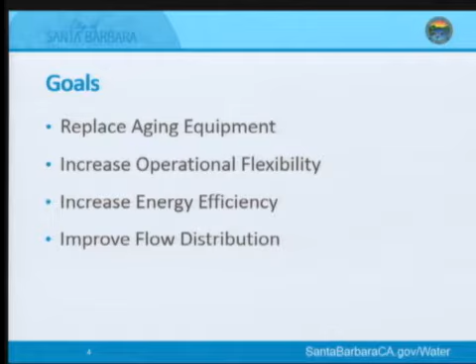Before I continue, I do want to make this one point: we currently treat to standards. We're not having any problems with violating our permits. We do make our permit, and that's not what this project is about. It's about improving our water quality, replacing our aging equipment, and making our whole process much better.

Before we go into the nuts and bolts of the project, I want to take a moment and bring you into the treatment plant for a little bit of treatment and process overview. I think it will help as we go through to bring an understanding as to what we're doing.

This is a snapshot of basically our treatment process. Up here on the upper left hand of your screen is where we've got the water coming in from the collection system. If we zoom in, we've got our headworks station right here. That's going to screen out all of our larger objects that we don't want going downstream to damage equipment. It screens out things like paper towels, twigs, diapers, all that sort of thing that can really get clogged up in our pumps. The next thing that happens with the water is it goes into our influent pump station.

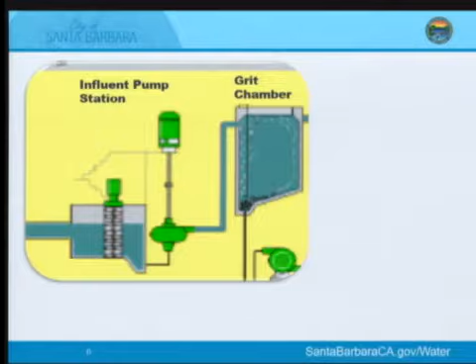Where it gets pumped up to the aerated grit chamber. Once we get inside of the grit chamber, we're going to be slowing that wastewater down. We're going to be letting our inorganics settle down to the bottom, as you see from the picture right here, and our water's going to continue on.

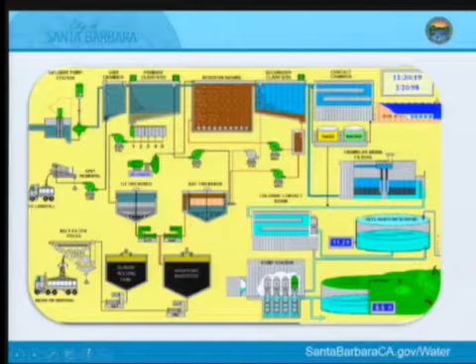We're then going to move over towards more of the top center of this picture. This is really where the nuts and bolts of the project are going to happen. We're going to go into our primary clarifiers next. In our primary clarifiers, we're going to continue to slow that water down. We're going to have those settleable solids start to settle out, and our water is going to continue down to our aeration basins. The aeration basins is where the biological process takes place.

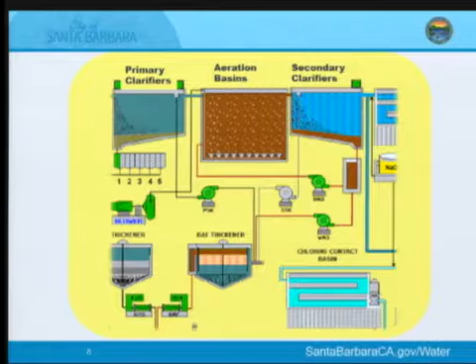It's where the treatment takes place with the bacteria that Joshua was talking about. This is a critical aspect of our project. We've got our bacteria in here. We aerate it because they need air, and then they break down the organics in our wastewater and help treat it biologically. Once it leaves the aeration basin, it goes into the secondary clarifiers.

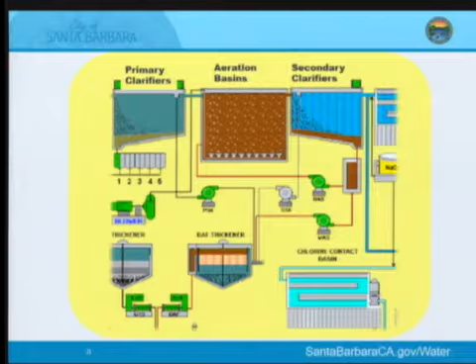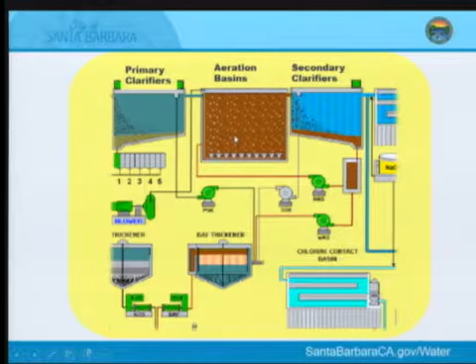Your bacteria, or your sludge, is going to kind of compact and settle down to the bottom, as you see with this brown stripe right here. Your clear water is going to be decanted off the top, and it's going to go down and be disinfected. What's going to happen with your bacteria, here's your sludge, is going to end up going into a wet well, and then it's going to recirculate and go through that whole loop again, although a portion of it will be wasted because we need to control our population.

So the aeration system improvements, most of the project is really centered around these. As I stated before, it's the biological process. We're looking for that greater diversity of the bacteria and that higher quality effluent when we're done.

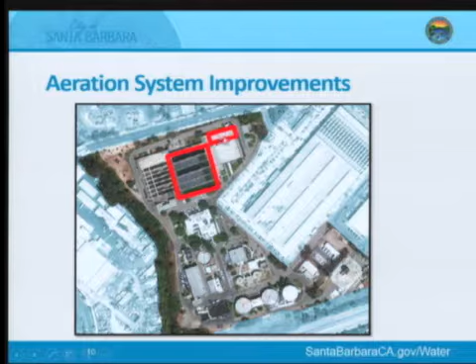Your aeration basins are this big red square right here. We have 6 of them. Underneath this big white area are your primary clarifiers - those are the covers on them. Underneath, we've got a whole gallery, and that's where your blowers are. Your blowers, they're really that critical component of the aeration basins. They supply the air that's needed when your bacteria is breaking down those organics.

In the absence of air, if our blowers were all to completely go down, within about 15 minutes we're going to start to see that the bacteria start to degrade. And within a very short period of time, they will start to die off. So it's really important that we replace our blowers.

In replacing these, not only is it going to be replacing our aging infrastructure, which is so important - we're actually having problems maintaining these at this point because parts are becoming obsolete - we're going to be giving the operators greater operational flexibility. They're going to be state-of-the-art blowers with controls where the operators are really going to be able to dial in that air supply to meet the demands of the aeration basins.

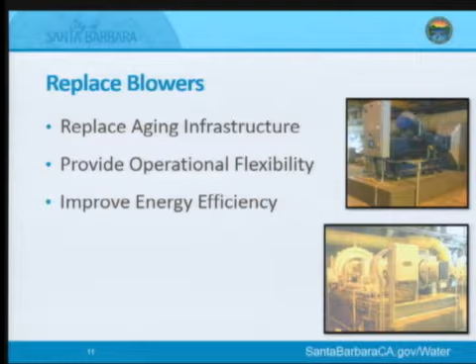We're also going to be improving energy efficiency. New blowers means better efficiency, and it's going to decrease costs for us on electrical costs.

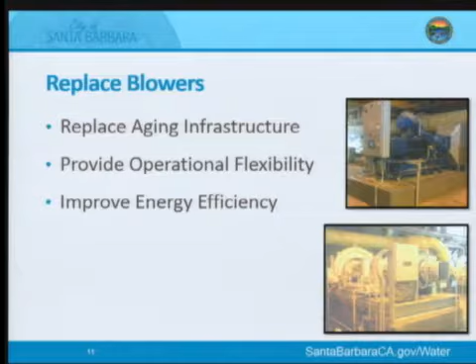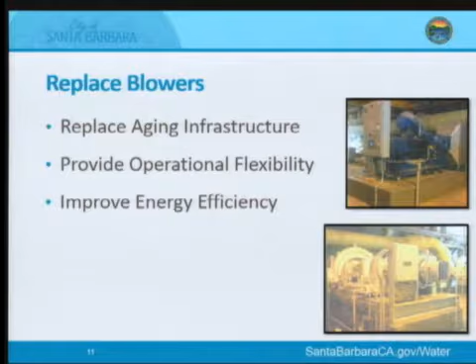I want to take a moment as we're talking about blowers to talk a little bit about construction. When we get into the construction, sequencing is going to be very critical. We start seeing the biomass degrade after 15 minutes, and we've got some issues with how our blowers are actually connected electrically. So it's going to be one of the many hurdles we'll face during construction, keeping the air going while untangling electrical connections that aren't quite desirable for a project of this magnitude.

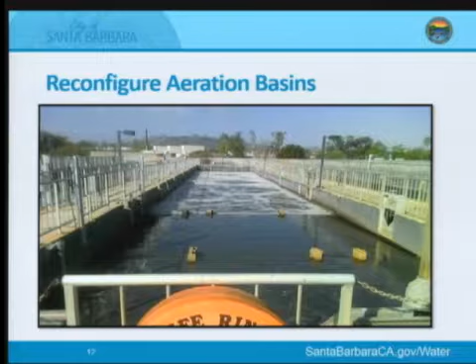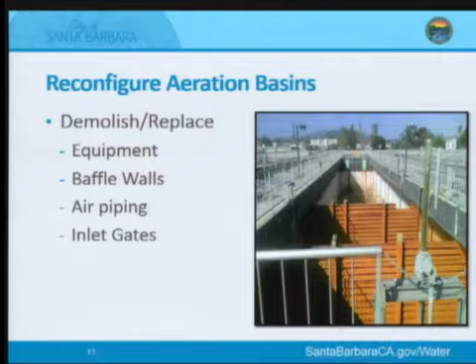One of the things we'll do when we reconfigure the aeration basins is change how we treat this water. We're going to break it into various zones with different bacteria doing different things with our wastewater, breaking down organic matter. You may see in the council agenda report that we're going to a nitrifying system, converting the ammonia and nitrate to nitrogen gas, so we'll have far less ammonia in our effluent when done. It's going to be the stepping stone for reuse if we ever choose to go there.

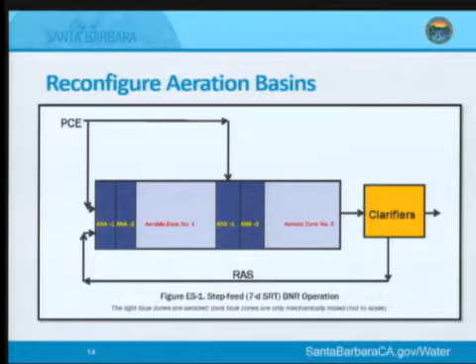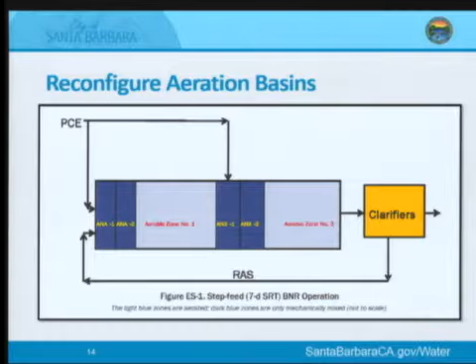When we go through construction on the aeration basins, we're going to start with just one or two at a time and upgrade them as we go along. The sequencing for that portion shouldn't be as challenging as some other portions, but it's still going to be very challenging to construct while this facility runs and treats wastewater 24/7.

In addition, in the clarifiers, we're going to be replacing some of our aging equipment, our drives, and things like that.

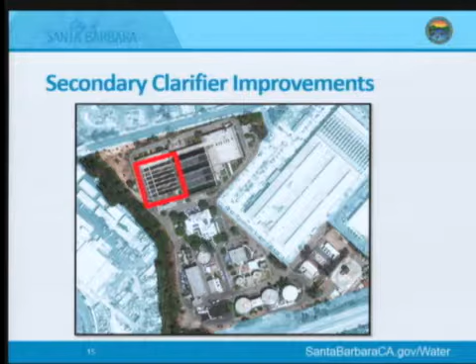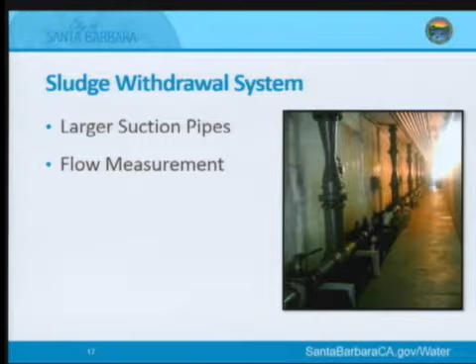We'll also be upgrading our sludge withdrawal system. Most of it is seen in the red boxed areas, all underneath the secondary clarifiers and down in the gallery. Here's a shot of the gallery showing some of the sludge withdrawal pipes. What's interesting is the sludge comes out and gets pushed hydrostatically back up to the aeration basins, then goes by gravity to the wet well - kind of a cool phenomenon. We'll be increasing the size of those suction pipes and putting meters on them for better flow measurement.

Here are some of the pumps we'll be replacing. These 3 pumps off to the right recycle our bacteria back to the front - you might hear the term return activated sludge, or RAS. Those are those pumps, and we're going to upgrade to 4 of them. During construction, because we have to upgrade both our pipe sizes and our pumps, the contractor will need to come in and put in a temporary pumping system while all these improvements are made.

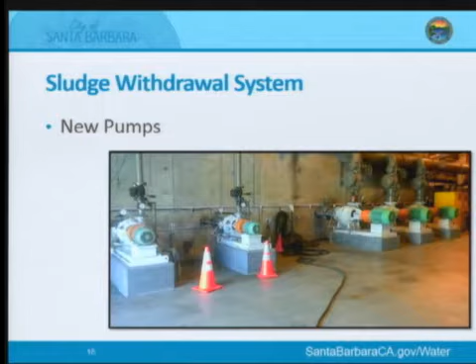In addition, we'll be putting a new line to waste our bacteria, or our sludge. This line is going to go down through the plant, as you see with that red line. Construction of it is going to be challenging because we have a number of underground utilities that cross our plant, and it's just very challenging to do.

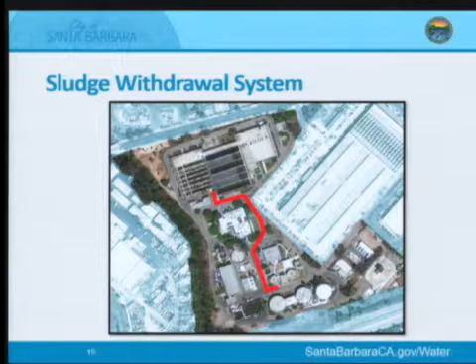I'm sure you've heard a little bit about some of the contaminated soils issues we've had with the desalination plant. We've planned for that accordingly in our bid by putting a contingency in, although we're very hopeful that since we're only going down 3 to 4 feet, we're not going to hit contaminated soils. But that's something we've actually taken into consideration in our bids.

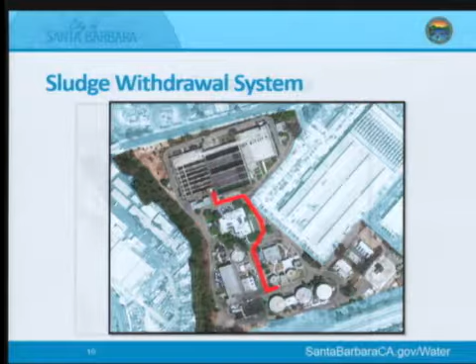We'll be having a new chemical storage area. One of the things we're moving to, and I spoke to the commission maybe a year and a half ago about, is chemically enhanced primary treatment. We'll be putting new chemicals into our primary treatment that will help us reduce the overall loading to the secondaries, which means you'll be able to increase or decrease some of your air demand. We'll be using a couple different chemicals.

Here's the site. We'll have ferric, which is, we already use ferrous at the beginning of our plant for odor control. It's required for part of our APCD permit. We're just going to be putting it at a different spot now, at the front of our primaries. It's going to serve as a coagulant, so it's going to help those organics start to clump together.

Then we'll be putting a polymer in there. That polymer is going to act as a flocculant, so it's going to help those clumps start to settle down. In addition, we'll be putting ammonium sulfate in, and that's going to help us with our disinfection process.

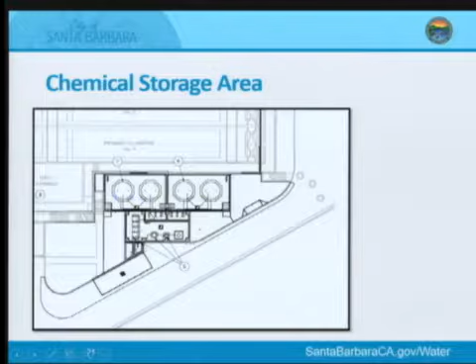I put the plan view up here so you can see this is going to be a bulk storage area. So the drivers, they'll be able to come up through this driveway, park their trucks right here, and pump their chemical into these bulk tanks. And this is a 3D model of what that site will look like.

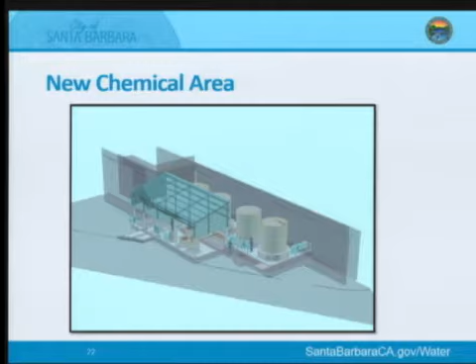Probably one of the most critical things is the startup, as we start moving to this new process of diversifying our bacteria, moving towards a nitrification process, is that actual startup of it. We anticipate that we'll be putting in all of the improvements first, and then we'll be looking at starting up and changing this process.

It's basically recirculating those bacteria through. It's not introducing new wastewater to it. That's happening in the other remaining 3 and 4 basins. This is really just going to be growing that bacteria. Once we get to that desired concentration, we're going to add one more basin online, one more basin online, and then we'll flip the switch, so to speak, and we'll be in our new mode of operation.

We expect that it'll take somewhere between 14 to 21 days before the process is stabilized. This is a very critical point in the treatment process and in this construction process. We've asked Brown and Caldwell, our designers, to have their process people down when we're starting up this new process. And it is going to be critical.

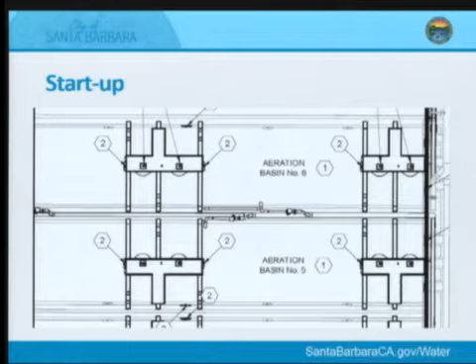However, construction management isn't just construction management on this project. It is operational support as well. We have Brown and Caldwell coming down to help us start it up. We have them helping us with updating our operation and maintenance manuals, upgrading our CMMS, our computerized maintenance management system, with all of the new equipment. We've got some design going on.

One of the things we found out during final design, very, very late, was the water from the desal project has a very low alkalinity compared to what we're seeing. We're going to need to design an alkalinity facility while this project's in construction, and we're going to have them constructed as well. So there's also some design in that nearly $5 million number.

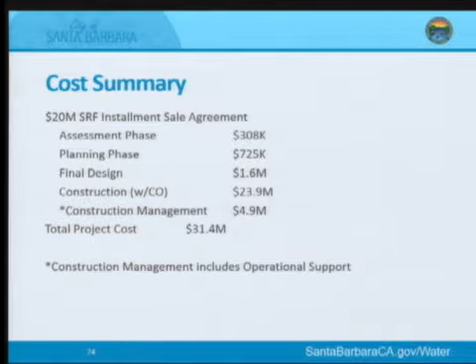So one of the things you may be wondering is how we got from $20 million to $31 million as a total project cost. Between the preliminary design, when we were at about $16 million construction cost, we have added the chemical storage area, which wasn't considered initially. That's a couple million dollars. We've had some additional equipment, electrical work that we've had to do and put into the project.

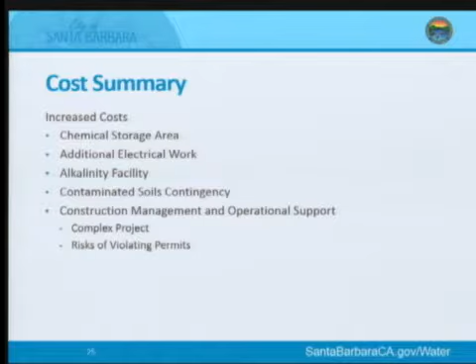The alkalinity facility, we've put about $500,000 as a placeholder in the bids for that facility. We've added about $500,000 of contaminated soils contingency that we really hope we don't have to use, but it's there if we need it. And then obviously the construction management and operational support is higher than the original 10% that we normally would see on those contracts. So that's how we got from 20 to 31.

If we take a look at the project timeline, we're hoping to go to council in February for award of a construction contract. Some of the process to get there is challenging because of the SRF loan. We have to do an amendment to our loan from the $20 million to the 31, which is in process. Once we get that amendment, we can go to city council and award the construction contract. It could be we'll have to do an ordinance to allow the Public Works Director to enter into the amendment.

So there's a little bit of a timing issue. We may be March, and then we're hopeful we can start construction as soon as April. It may be more like May. And it's about a 2-year project, so you'll look to see a completion in summer of 2018.

And that concludes my presentation, and I'd be happy to answer some questions.

Thank you. Very nice presentation. Do we have any questions from the commissioners?

Thank you, Mr. Chair. Just a couple. So, Josh, you may be more appropriate. So, as these loans stack up, the $31 million here, the $50 million there, is there just a general amount for a single-family residence that you could say for a $31 million loan or a $50 million desal loan that it's adding to a monthly service? Amortized, it's a 20-year amortization?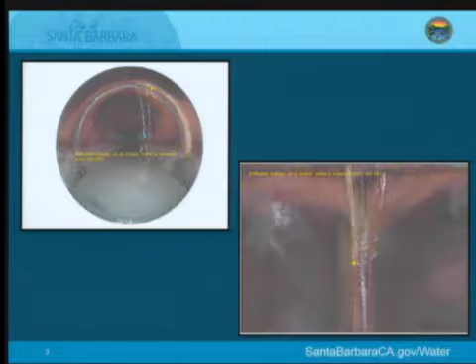It should be complete. So taking you through the purpose of this project: back in about 2012 we did a condition assessment of all our large diameter sewer mains, one of which is the 33-inch clay main out on Cabrillo that runs in the beach—I'll show you a picture of exactly where it is on the next slide. We found a number of infiltration spots. You can actually see the infiltration coming in—that's seawater coming into our pipes. While the pipes are structurally sound, we didn't find any real big deficiencies in them, but we have a lot of active infiltration coming in on those pipes.

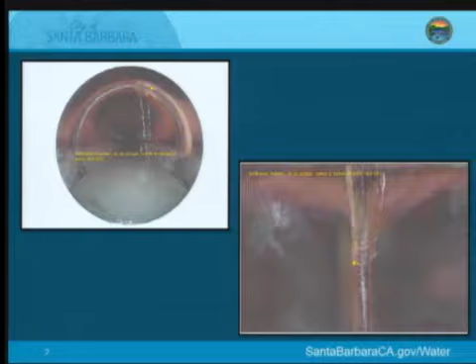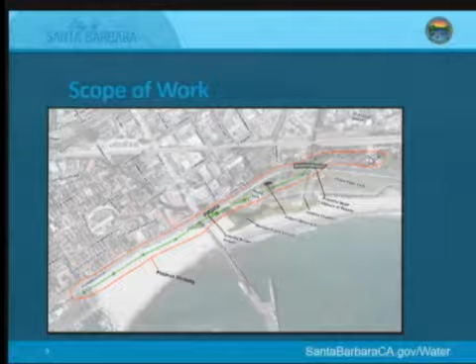Part of the challenges with this project were permitting. That pipe lies partially in the local jurisdiction and partially within the California Coastal Commission jurisdiction. Initially we had some challenges as to how to move forward permitting wise, so we went to Planning Commission and got their approval to defer to the California Coastal Commission to get a waiver. That seemed to streamline the process, only having to work with one jurisdiction rather than two as we go in and out of the jurisdictions.

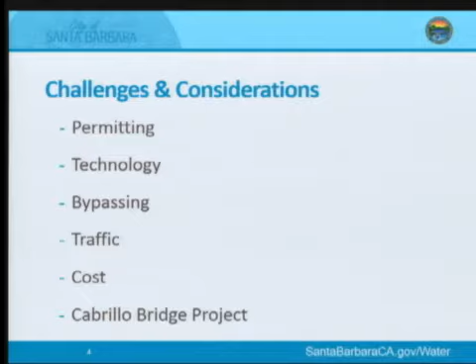Technology, what's the best way to accomplish this? We looked at all sorts of different technologies. Do we just chemically grout those joints? We felt like if we did something like that, we would have infiltration pop up somewhere else down the road and we wouldn't really be solving the problem. We looked at the different types of rehabilitation, and we finally landed on the cured in place liner, which is similar to what we do on our 6 and 8 inch lines all throughout the city.

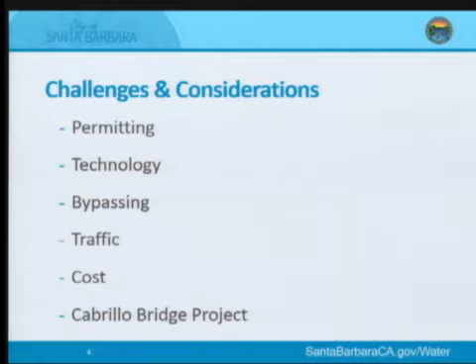Bypassing and traffic control were very challenging for this project. Cabrillo Boulevard is not somewhere that I really like to have bypass lines running down, pumps, traffic control. Cost was definitely a concern, as well as we've got that ongoing Cabrillo Bridge project. It's causing a lot of problems with sequencing.

So I talked a little bit about how we're going to do the cured in place lining. We left it open. When you do the cured in place lining, you can do one of a couple different ways of curing the liner. Traditionally, as you see in our 6 and 8 inch lines, we do thermal cure, so they'll use water or steam to put the liner in, cure the resin, and it becomes a very hard, structurally sound pipe within the pipe, so to speak.

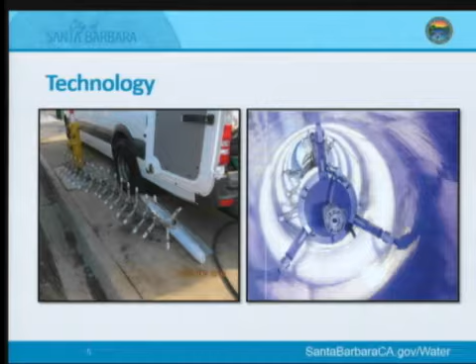One of the benefits to having UV cured is that it came out to be half the price, and the reason it came out to be half the price is because their curing time is much faster. They're going to be curing the pipe at about 8 feet per minute, knocking down that overall construction of the segments to about an 8 to 10-hour day by the time they set up their bypass, clean the pipe, TV the pipe, put the liner in, cure it, and take it off bypass. We were looking at considerably more time if we were to use the traditional steam or water cured.

Another benefit is that styrene smell, that stinkiness that you might have smelt if you went by any of the rehabs. We tend to get some complaints on that. UV cured doesn't release that styrene because it's got a different curing process. We're also directly upstream of the plant, rehabbing very large mains, and styrene can really ruin your day on a secondary treatment if you get a good slug of it coming in.

So they were able to come in at a lower bid because they don't have to deal with the styrene, whereas the other companies bidding on it, the traditional water cured, had to put in a non-styrene resin, and at a premium cost.

We also were looking at localized chemical grouting on some of the pipes because we've got that infiltration coming in. When you're doing the thermal cure, that causes a heat sink, so we had to put that into our bid items. With UV cured, we are not going to have to utilize those bid items because all you have to do is inflate your liner to a pressure that's greater than your water pressure coming in, and then you can go through and cure it. So we're going to be looking at about $100,000 savings by not having to chemically grout the actual pipe segments themselves.

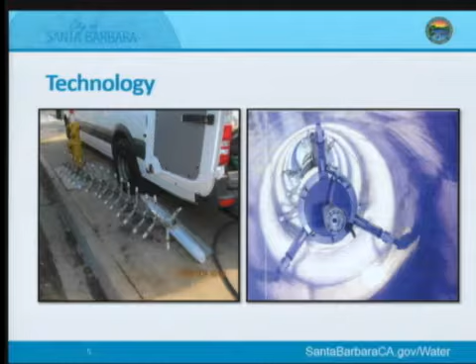They're on the northern side right now constructing. They're going to move to the southerly side. We lose our ability to bypass basically April 1st when they move over to the southerly side. So we're going to be in construction next month, March, and then hopefully we will be completely done.

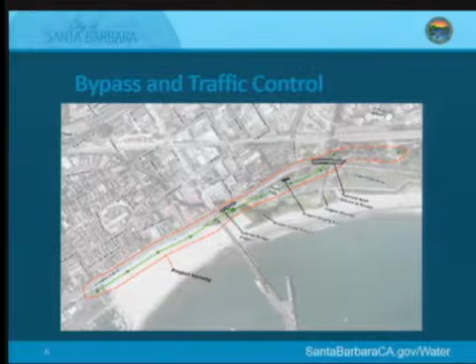We have put a lot of conditions regarding weather into the contract so that if the contractor has rain in the forecast, they're not allowed to construct because we don't want them constructing when we have inflated flows. If we didn't do this project now, we'd be waiting until Cabrillo Bridge is completed before we'd be able to get into our next window and do the construction.

Our construction costs and timeline: we're looking at about an $860,000 construction cost. That's where the low bid came in. We'll be giving them their notice to proceed in February, right around the 1st. You'll see them mobilizing down on the beach, and they should be substantially complete in April. They may be doing a little of the manhole lining work, but that won't be as difficult as the actual sewer main lining work.

I'm not sure I mentioned this at the beginning, but the whole purpose for this project is to reduce the total dissolved solids coming into the plant. When we're getting seawater infiltration coming in, it's raising our TDS, or total dissolved solids. So this is going to help bring that number down, which is very important for recycled water.

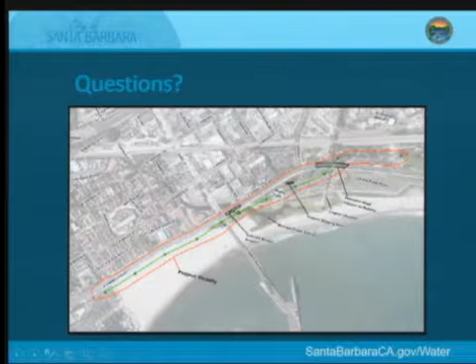I'd be happy to answer any questions. Thank you, Ms. Arroyo. Any questions? Commissioner Jordan, thank you, Mr. Chair.

So if you're having infiltration, aren't you having exfiltration too? Our pipes are down there surrounded by seawater, and we've got that hydrostatic pressure pushing water in. I suppose under certain conditions it may be possible that your internal pipe pressure would have to overcome that hydrostatic pressure for that to happen. So we're thinking it's highly unlikely, or doesn't really happen a whole lot if it does.

And on that line on the left part where it says project vicinity, that's all in the sand actually where the piping is? Correct, it is in the sand. We come out of the sand a little bit here, we cross Mission Creek right in here, and then there's Skaters Point right there. Then it continues on up across Cabrillo Boulevard and into the plant.

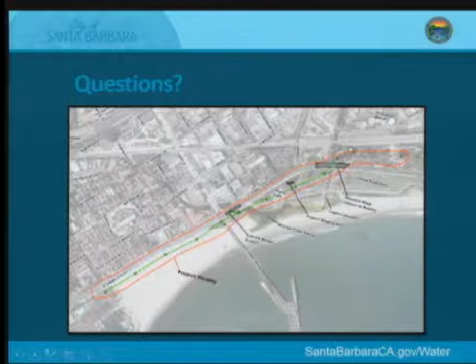And you said how many feet a day? They're going to do about one segment a day. The segments range from about 300 to 500 feet. It's going to be 2,400 lineal feet total.

Other questions or comments? I had a question regarding the CIPP, using steam cured versus UV light. How do they make sure they maintain adhesion to the wall of the pipe when running the UV train through? Because when you inject steam, you pressurize the pipe and it sticks to the wall. How do they maintain that using UV? They use air instead of steam, air that pushes it out. So it'll actually be pressurized as the UV light goes through? That's my understanding, yes. And I can confirm that for you.

I have just a comment that I'm very glad to see this being done. It's been a matter of frustration for a while that we're getting the seawater infiltration there. Ironically, one of the things considered in our study of desal intakes is an infiltration gallery in the beach, and in fact we have one, albeit rather inefficient. So I'm glad to see we're getting rid of that. Thank you for the presentation.

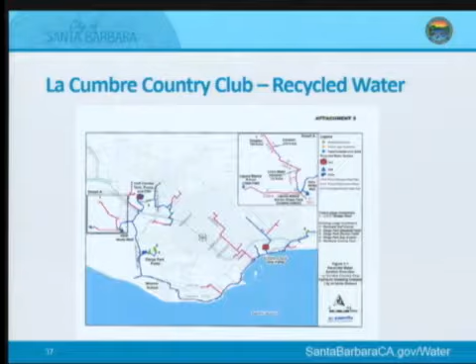At this point, we feel it's something worth exploring. La Cumbre Country Club is very concerned that if the drought continues, there could be a lawn watering moratorium, and being one of the only golf courses that doesn't have access to recycled water, they would be unfairly punished in the sense that they'd have to let all their lawns go.

So we are looking for input and comments from the Water Commission on this item. Have any comments? I'll go, Ms. Burney. Thank you very much.

I guess my concern goes back to what we've talked about for the last couple years, which is the cost to water turf. While I know a lot of community members use the golf course, my main concern would be providing recycled water at our existing recycled water rates and not the actual cost. That would mean our residents are bearing the brunt of people being able to golf. So if we proceed with this negotiation, which I have full confidence in staff to handle, I would just want to ensure they were actually paying the true cost of that water.

Mr. Chair, I see in the staff report, and I just wanted to clarify the same thing. It says that you're going to negotiate on the basis of full cost recovery. And I'm assuming that's exactly what Ms. Burney is talking about also.

That's correct. We've had some initial discussions with them, and I've been very clear that there's no way we're subsidizing this water to them. I think there's a general understanding that they'd be paying the full cost of the recycled water, and at times it's going to be more expensive than their potable water. But I think they're seeing the need to diversify their supplies, as this would be their next cheapest option to explore.

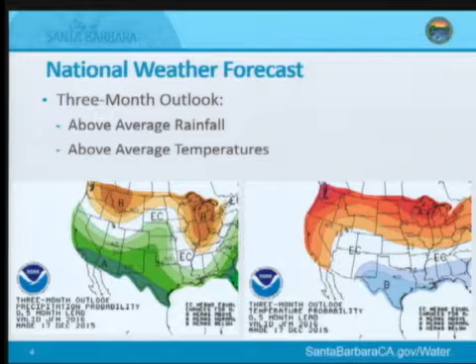Weather forecast continues to be optimistic going into the future. Unfortunately, NOAA didn't have their updated forecasts when we checked today, but despite January being somewhat dismal, they still believe the rains are coming in February and March.

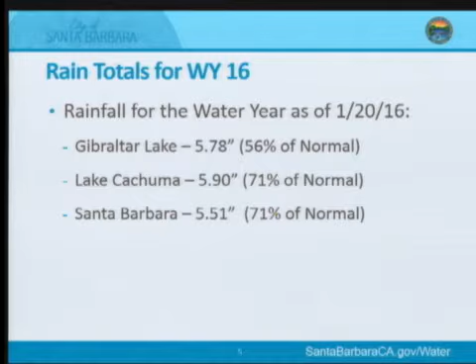Gibraltar, sadly enough, sits at 56% of normal rainfall. The big two-day storm event in early January unfortunately did not pay off in the backcountry as much as it did on the coast. Kind of unusual - usually we get twice the rainfall back there or more, and it just didn't bear fruit this time around.

We have some information on how the rest of the state is doing, and this plays into our strategy for getting water for next year. As we've talked about before, we do have sufficient supplies to get us through 2016. We're already planning ahead for 2017. As it stands now, Northern California is tracking on average, which is hopeful.

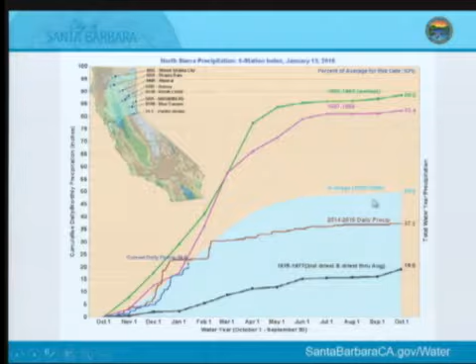Absolutely, thank you. So what we have on this graphic here - and I apologize for the size - this right here, the blue shaded area, this defines what an average rainfall looks like. This is a compilation of, I believe, 8 weather stations up in Northern California that they use to make this graphic, showing where we were last year with that dismal rainfall, but also showing some of the peak rainfall we've had, 82-83 and 97-98.

Right now, we are tracking nicely with an average year in Northern California. Despite all the media coverage of the rainfall, really it's average, which after so many years of drought is just a vast improvement, right? So we continue to watch this, but what's hopeful is our ability to purchase water should we need to do that to make ends meet for next year, which we're going to need to start discussing shortly. Hopefully the spigot doesn't turn off for Northern California and end the year short - but that's where Northern California is.

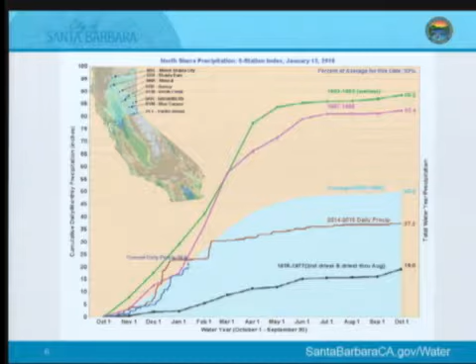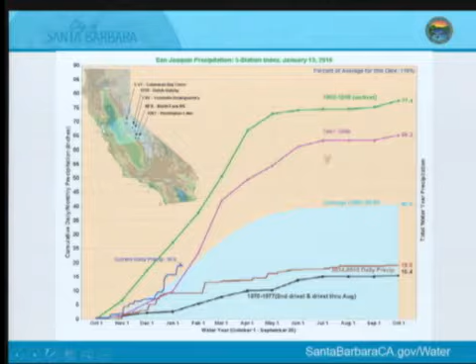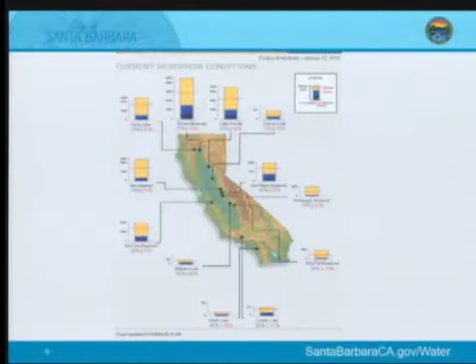General reservoir status, we're still way below average. The red lines on all these depict what we might expect that reservoir to be this time of year on average - still significantly below. And then this last graphic here - oh, thought there was a snowfall. There you go - this is snow accumulation, northern, central, and southern, and right now it's tracking on average for snowfall. As we've talked about before, the state's largest reservoir is really snowfall, and this is what will ultimately feed those reservoirs come spring and summer.

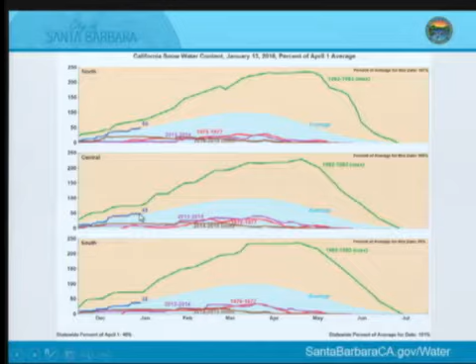Community conservation continues to exceed our target, which is fantastic. As we've talked about in the past, December, January, February, March are difficult times to hit the conservation target because there is less outdoor discretionary water usage. But the community was able to hit 28% for December. We're now at 34% cumulative conservation since declaring Stage 3.

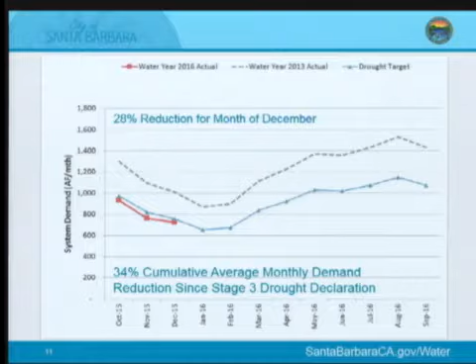Our water supply strategy - I continue to show this graphic here with our current supply strategy at 25% conservation. It shows about 2,000 acre feet of shortfall in 2017, and this assumes no reservoir inflows and no additional state water purchases. So we've been focused on how to address that. The next graphic shows what if we move to a 35% conservation target in May. If things stay dry, I believe this would be where we'd be recommending to the Water Commission and council that we go.

In that case, we're looking for about 300 acre feet of water to purchase roughly for next year to make ends meet. Is there any questions or comments on this before I move on?

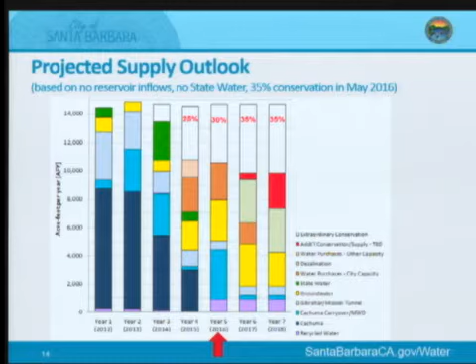Okay, we talk about it so often, I apologize if I skip over it and don't go into great detail. Water supply planning, tentative milestones—just want to keep putting this out there. This is what we're currently planning for.

On the demand management side, as I said, we're looking ahead. In March, we're going to kick up the discussion, depending on what rainfall looks like, whether we need to move to that 35% target and whether we need any additional regulations to get there.

On the supply management side, we'll be talking about water purchases here shortly. We actually will start looking for water in February. That's going to be an active discussion, and we'll start getting agreements lined up and wait as long as we can to execute, which is typically in the April timeframe.

We are moving forward with at least the general planning for a desal expansion. The current timing for the expansion right now is where it would actually play a role in our water supply should we decide to move forward—it would not really impact us until 2018. So expansion of this facility does not do anything for us in water year 2017.

Again, I don't think this is where the Water Commission is, nor where staff's at, but I think to be prudent, we're doing the planning necessary for this. The one thing that we've been developing is the cost for the transmission of this water. We have a pretty solid number from IDE for the treatment aspects of it. We are asking them right now to give us if there's any cost impacts from holding their bid until late July, because we feel like to get all the funding in place, it would probably be late July.

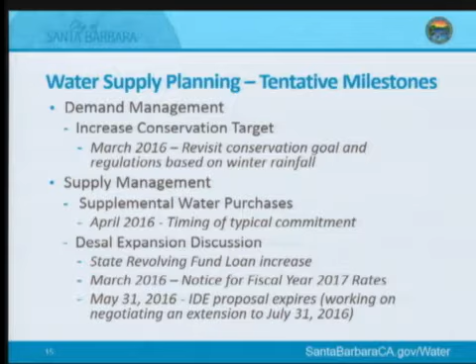I should back up really quickly and say this: we believe if things remain status quo for now, there will not be a need to consider expansion. We feel that based on rainfall in Northern California, we should be pretty successful in purchasing water, and believe going to 35% conservation kind of heads off the need. But in the meantime, we're still preparing this information for discussion.

Water rates updates—we are in development with those, going back and forth with Raftelis, trying to incorporate. There's just so many elements to a rate model. Trying to get all that information together and present something to Water Commission in February. We may have to have a special meeting with Water Commission in early March as well, just timing, trying to get all this together, because we do need to get notices out to the community in March of our proposed rates.

And so there's so many pieces in the air. Certainly having some confidence about what the rainfall is going to be and what kind of supplies we have locally will be really important to that discussion. What we're really focusing on for FY17, because we do have the costs in there for reactivating the desal plant and for operating it, is the status of our reserves.

Our reserves are in pretty dismal shape, and the reserves have been set aside for just such an emergency, so I think that's appropriate that they're so challenged. But it's trying to figure out what is going to be our recovery plan—how long are we going to take to recover those. That's going to be part of our rates discussion, and I think some of the policy input we're going to be looking for.

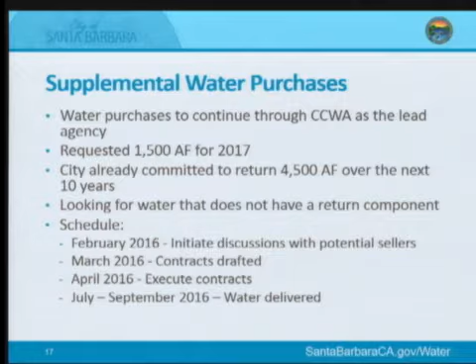So in February 2016, we want to initiate discussions with potential sellers. We've reached out to the water broker we've used in the past, and he's already got some potential sellers in Northern California. We'll probably be drafting contracts in March, holding off until late April before we have to execute them. That's basically the planting season up there, so they need to know whether to plant or fallow the land. That water then gets delivered July through September to the State Water Project.

So Gibraltar, as of yesterday, has 518 acre-feet in it, or 10% of capacity. We are currently not taking any water from Gibraltar due to the poor water quality.

Staff up there said they're prepared for El Nino should it show up. They've been up there making sure to keep the roads open—those routinely get closed anytime we get any rain, there's just rock falls. They've got food up there, so they can stay for several days if they get cut off. And they have all the log booms out for debris.

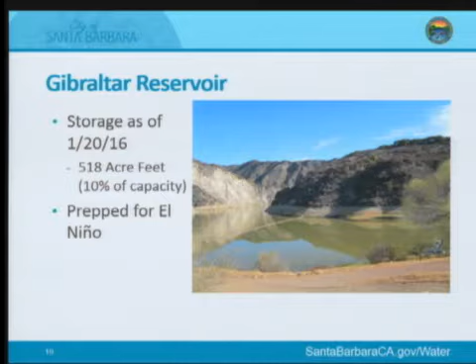Lake Cachuma sits with just over 28,000 acre-feet, or 14.8% capacity. Fish water releases continue at about 280 acre-feet a month. The latest discussion, which we talked briefly about last month, was the evaporation. The Bureau has made a decision on how the evaporation of the lake is going to be managed, but they did agree to revisit it in the spring.

The way the Bureau is going to be managing it punishes anybody who has water in the lake come this summer. We tried to point out that the way they've structured the evaporation—who takes this evaporation—really incentivizes anybody who has water to get it out of that lake before summer, because you're going to be taking the full burden of the lake's evaporation on whatever water you own. In particular, the challenge is that the downstream water held in the lake does not evaporate.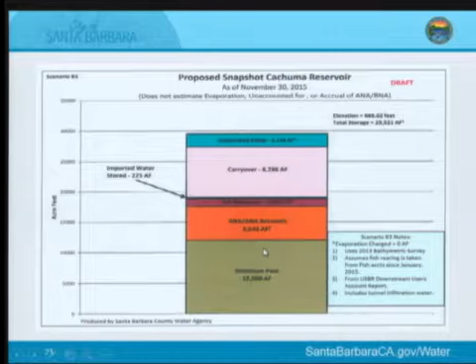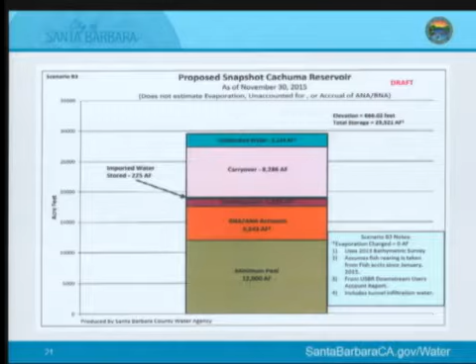We've been pushing the Bureau, saying this minimum pool should help make up the balance of this evaporation. For whatever reason, they've been holding that water as sacred and saying it shouldn't be used. We're hoping if things get bad, they'll reverse their decision. We'll be bringing the Water Commission along on this in case we need some muscle. This is one of those frustrating ones, and hopefully we can figure it out for the next drought, because this is...

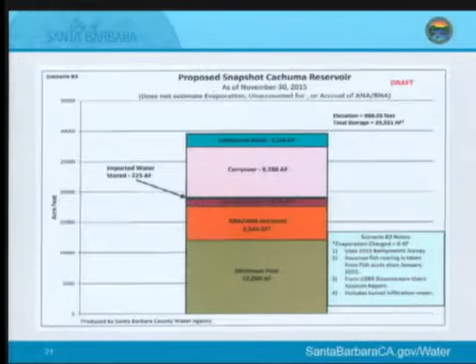Unfortunate. Do we know what the anticipated evaporation is going to be? We do—we've made some estimates. The county has put together some estimates.

I want to say it's somewhere in the 7,000 acre-feet of evaporation. Right now, under the equation that they have, our carryover water would take about 2,000 to 3,000 of that evaporation, and so they're looking and saying, okay, well, the other 4,000 will also come out of carryover. Well, there's only what's left in carryover. It basically erased everything in carryover.

And what proportion of that carryover is the city of Santa Barbara's? About 3,000 acre-feet. We actually have, that was the other challenge, some of the most carryover left, which on one hand is good, and on the other hand, you don't want to be left with the most carryover because you're going to take the most evaporative losses from it.

So this is something that has our full attention, and we continue to push back on it. Hopefully we'll see some inflow this year, then that evaporation will come out of any inflow that comes into the lake. Unfortunately, though, there hasn't been adequate inflow in there to make up for that evaporative losses.

And what's the unallocated water? That is actually inflows from the Tecolote Tunnel. And right now, we're planning to use that to help offset some of the evaporative losses. So that's how we've kind of structured it with the Bureau.

Well, okay, how about this water? Since there isn't sufficient water outside of carryover anymore, there's no new water. Usually that's where a lot of the evaporation comes from, is the water in the future. We at least agreed that water coming from the tunnel would go to help satisfy some of the evaporative losses. Unfortunately, it's not. What does it end up being? It's not sufficient to cover the full evaporative losses.

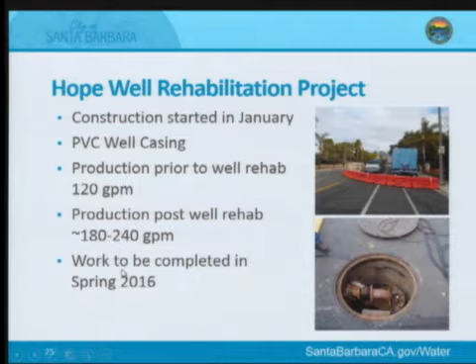Desal project update. We did go to council and get the $2.3 million that we needed to move forward with the cleanup under the proposed project. Again, it doesn't clean the whole site, it's just taking care of the area where we're going to be working. So far, we're able to accomplish this within the $55 million that's been allocated already, so this basically is just eating up a lot of contingency that we had built into the project. Should we come across anything unexpected, then we'll have to talk about increasing the loan amount.

Schedule impacts, we did lose about 30 days of work as a result, and Ms. Szymanski is working with the contractor to try and recapture that time. At this point, I haven't seen anything formal out of it, but I do know they're working on it. So I think worst case scenario, we'd be talking about a November completion versus an October completion. Don't think it'd have a huge impact on our water supply planning at that point.

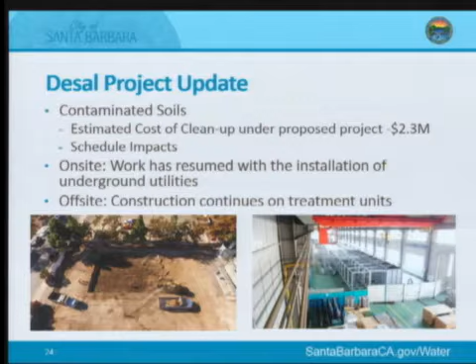Thank you. Last month, when Ms. Szymanski was here, she mentioned doubling up some of the construction forms to speed up that cycle. Obviously, there's additional costs there, but it sounds like from what you just said, we might not be doing that. Can you just give us an update?

Commissioner Burney, yes, that's still the plan, is to basically pay, and I don't remember the cost, but it was like $40,000 or $50,000. Instead of reusing forms, they're going to create new forms for everything so that they can do one big pour rather than a whole bunch to try and accelerate the schedule. I don't know what the schedule benefits to that were, but they are still working under that.

So, desal project update continued. You have the feasibility study. I think the most significant is the subsurface intake study. A draft report is out and available for public comment.

In summary, nothing survived that initial screening, and we are looking for any feedback on that. But based on the work plan and criteria we came up with, nothing survived that criteria.

Potable reuse study work is still in progress. We anticipate sometime in early June having a draft report for public comment, and ultimately at the end of June having a public meeting and finalizing that work. Should there be a viable option, we'd roll into a study phase of that. And then desal grant funding.

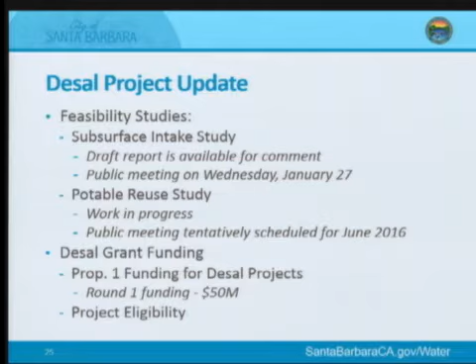And so obviously we take a particular challenge to that, and I have already gotten a proposal from BBK to help us make the legal case for why these Prop 1 funds, which were set up and sold to voters in response to this drought, and this desal project we've reactivated in response to this drought, it seems ridiculous that these monies shouldn't at least partially go to help offset those costs.

And so we have seen other Prop 1 money tied to the governor's declaration or the actual approval of Prop 1 by the voters as the start of the eligibility date. So we're hopeful we can make a legal argument for why they should consider a different eligibility window.

One thing that particularly piqued my interest: when we asked why it's taken so long — the voters approved this in 2014, and you're not going to let the money go until 2017? We've seen other Prop 1 money released a lot quicker. What's going on? Oh, well, we just don't have the staff, we're short on staff. And I'm like, so you're telling me because you don't have staff, my project's not going to be eligible for any grant money? That was kind of a frustration.

At that point I said, well, I'm more than happy to pay to have staff here to help you. And it was a very cordial and nice conversation. They seemed supportive, they really liked our project. That was one of the things I wanted, to introduce our project, and they were certainly very intrigued. They appreciated how much we have done for conservation before just moving forward with desal. They thought we were a good example of how they wish any community considering desal would approach it, exhausting a lot of their conservation efforts first.

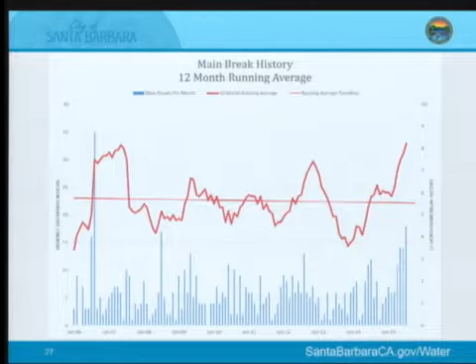As I think I mentioned last month, we are working on something to bring back to the Water Commission for a bigger discussion on possible approaches. The challenge right now is in the midst of an emergency trying to figure out financially how to go about doing this, but nonetheless I think we need to keep this discussion alive. We just had a main break this morning on Castillo on a 12-inch main, which is fairly significant. Unfortunately it was near a parked car, and the car fell into the sinkhole. Very unfortunate, but we'll hopefully work with that car owner and make him whole. Needless to say, our staff have been putting in tireless overtime hours trying to respond to all these, along with their ongoing regular duties.

So, anyway. Is there a seasonal signal in there?

Chair Keller, there is a seasonality to this. We certainly see fall and winter with a much more significant increase in main breaks. As we go down through it, that'll be part of our presentation - we can break out the seasonality aspects, break out what pipes are causing the majority of these problems - mostly from cast iron pipes - and from what age. There's a lot to this, and I think we could be very surgical about what work we plan and move forward with.

But certainly we can expect that during cooler times, especially as the temperature changes - and I think I might have mentioned this before - you've got a system that's frail, on the end of its useful life, and it doesn't take much. When you get that temperature change of 15, 20 degrees, that water's sitting in a reservoir above ground, cools down at night, and then it goes underground where the pipe is 60 degrees because it stays pretty stable underground. That contraction and expansion, with a pipe that's basically been doing that for almost 100 years now, it just says, I'm done. That's what we've been seeing.

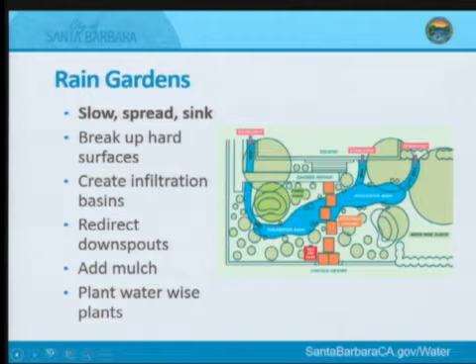Rain gardens operate on a simple principle of slow, spread, and sink. It's important to break up hard surfaces such as pathways to create a permeable surface, to create infiltration basins such as dry creek beds to distribute the water over a broad surface to slow it down and allow absorption, to redirect downspouts to enter the basin rather than run off on the hardscape, and to add mulch to retain moisture and help break up the soil to make it more spongy, and of course to plant water-wise plants.

To help our residents understand what encompasses a rain garden and to see the beauty in a rain garden, we have 3 demonstration gardens currently. The first one I would like to highlight is Spencer Adams Park at 1216 De La Vina Street. This was created in a series of hands-on workshops to upgrade it from a lawn to a native rain garden.

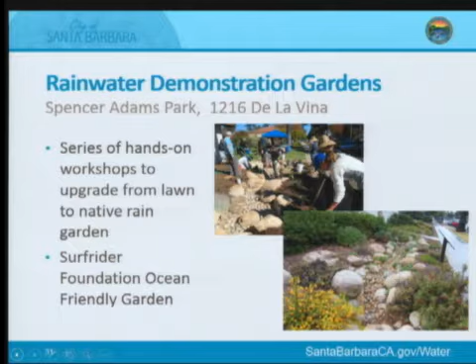These workshops were open to the public. We had a basics class, a sheet mulching workshop to get rid of the lawn, a planting and irrigation workshop, and a workshop for landscape professionals. The dry creek bed and the downspout were expertly installed by the city's park staff, and this whole garden was partially funded by a California Coastal Commission grant that was facilitated by the Surfrider Foundation as part of their ocean-friendly garden program.

The next garden is the Santa Barbara Association of Realtors rain garden at 1415 Chapala Street. This was created to highlight the curb appeal of sustainable landscaping. It was converted from a lawn to a rain garden that has 3 downspouts diverted into the infiltration basins. Last year, in 2015, which was an unusually hot year, they didn't need to water the garden until mid-August. So the rainwater really carried all the way through. They'll probably need to water a few months out of the year, but the prior lawn was watered 3 times a week.

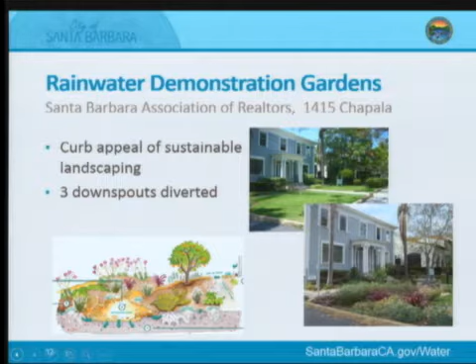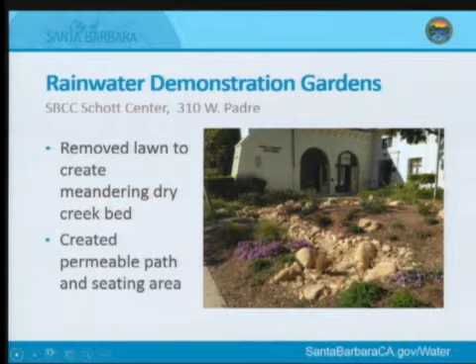The most recent lawn conversion was the Santa Barbara City College Schott Center at 310 West Padre Street. This was an unused lawn area by the auditorium, and they redirected a downspout to create a native rain garden with a permeable pathway and a really nice seating area as well.

To help our residents install rain gardens, the city has a partnership with the nonprofit group Sweetwater Collaborative. We sponsor hands-on rainwater and graywater workshops, as well as Graywater and Rainwater 101 classes, so people can understand the basics of these systems and answer any questions before they're actually in the field digging into the ground. This really provides practical hands-on experience for homeowners and professionals looking to install these.

Ms. Ward, where can people find that information when those classes happen?

That is a great question. Our main website is santabarbaraca.gov/water, but we have a specific page, santabarbaraca.gov/rainwater, and that's where they can find upcoming classes and workshops. We're here for any other questions.

Any other questions from the commissioners?

Big infiltration galleries, such as the ones that run down along the Santa Clara River by the Water Conservation District, plug up fast with silt, and they require a lot of maintenance to keep the infiltration rate up. I wonder if these demonstration gardens, or the advice we're giving, have any plan for maintenance so that the infiltration rate for the groundwater recharge aspect doesn't disappear.